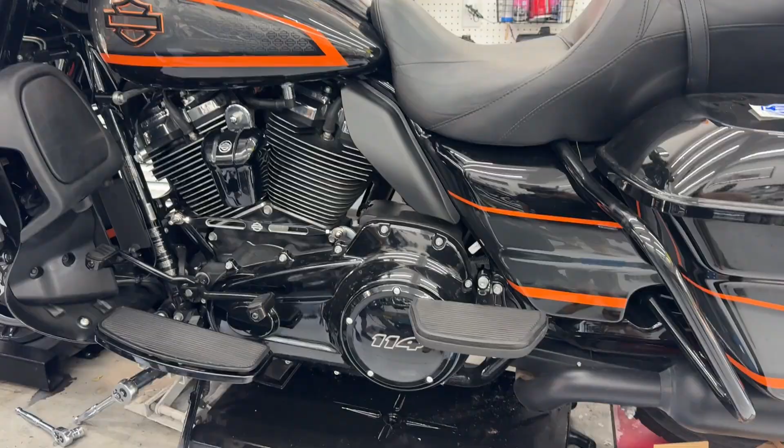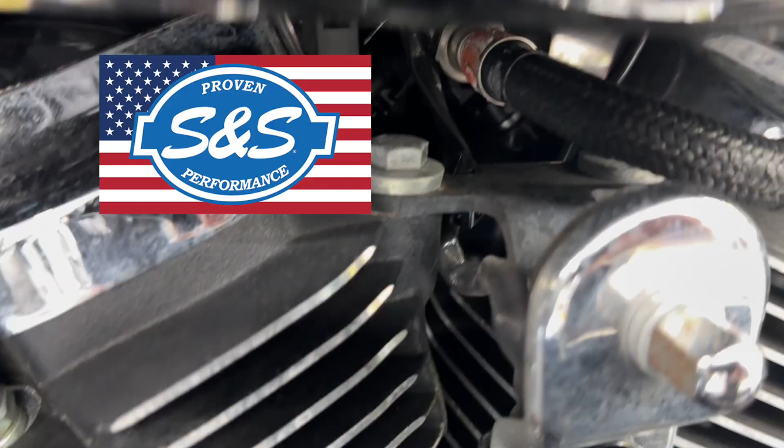What's up? We've got a really nice bike that we're going to work on today. This one's going to be getting the new S&S compensator to get rid of a potential problem. It's also going to be getting the new S&S intake manifold that's not plastic. We're going to get rid of the plastic one.

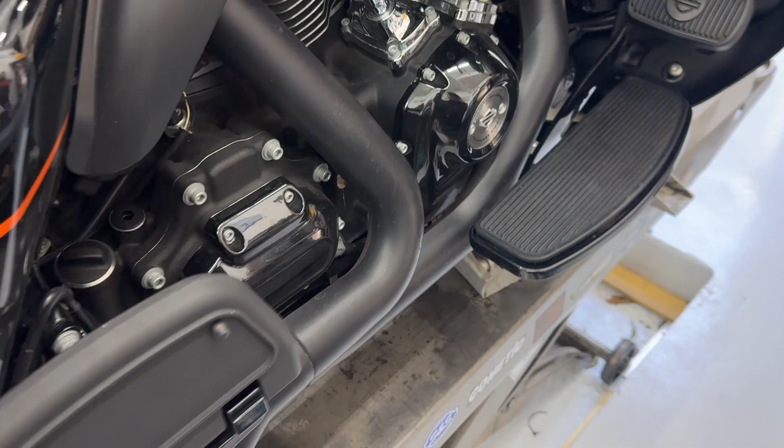It's also getting a good set of headers that's going to go behind the factory heat shields, and we're going to be installing a Thundermax to bring the engine operating temperatures down. We're going to leave the stock cam in it. So we'll show you where we're at here in just a couple of minutes.

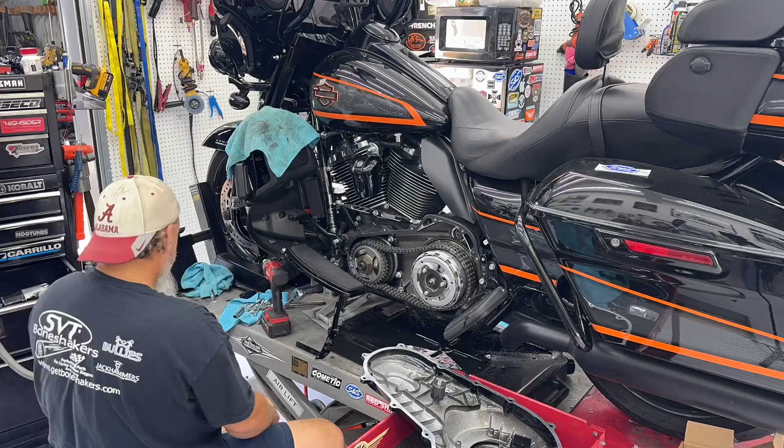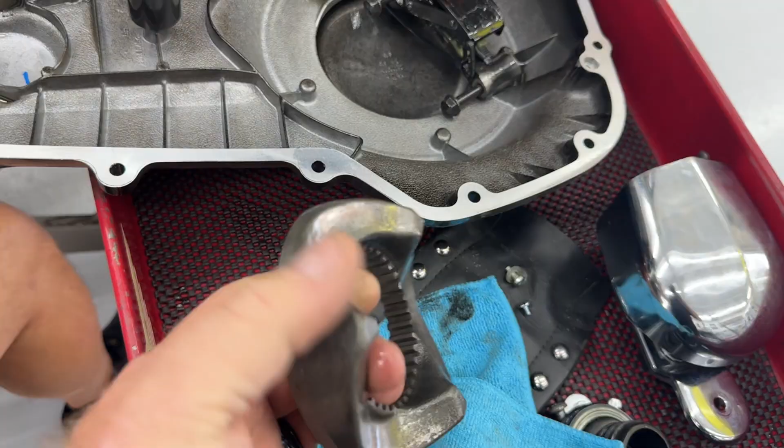All right, so the new compensator ramp is going in. Where's your old one at? Okay, so here's the old one. This is a cast steel. Cast steel is not nearly as strong as billet steel, or what's called extruded steel. And these things will split right here where this thin part is. They'll just split into three pieces without any warning.

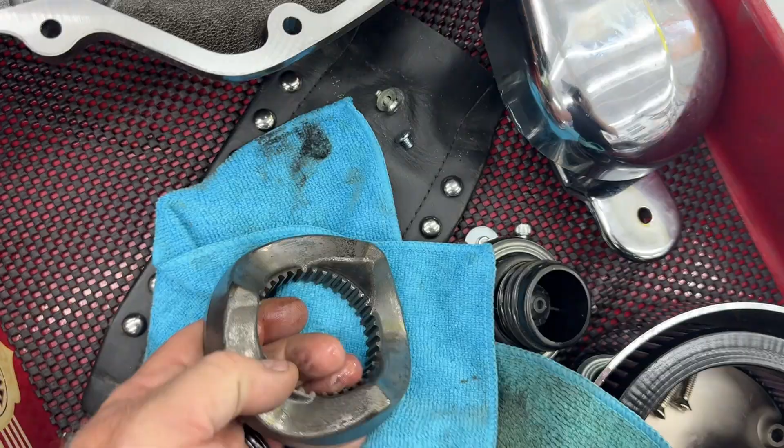You go to start your bike, crack. And that bike's not moving. You can't jump it. You can't push start it. You can't do anything. It's not moving. So any of you guys out there have a 17 or up bike, it's highly recommended that you replace the compensator ramp. Now, there's several different ones out there.

S&S has one. Cyclorama's got one. A couple other people have them. They're all of the same good quality. So we've used them all, and they've all worked well. Just out of convenience, we use the S&S because it's available from our source in one day. So that's why we choose to use it.

I did not know that.

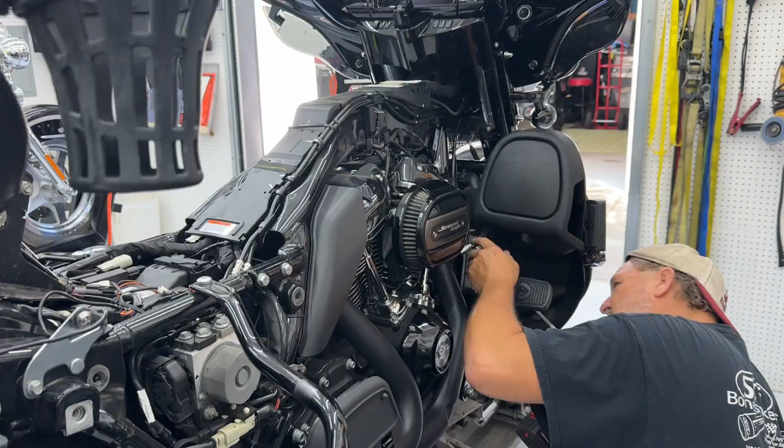And it's all back together. Now the next thing we'll do is pull the headers, and probably going to need to pull the gas tank and get the manifold installed and the Thundermax. All right, while Tony's removing the exhaust and intake manifold, I'm going to go ahead and prep the Thundermax. I thought I'd go over some habits that I've created over the years when I install these Thundermax units.

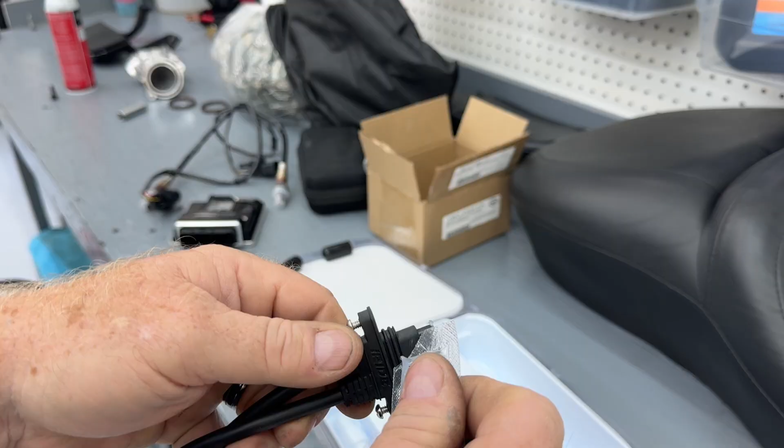So the first thing that's most important is they'll send you a little packet of dielectric grease. I always like to cut the corner off right here so I can get a precise little squeeze out of it. And then you want to put dielectric grease on every connection. Just simply squeeze a little bit, press a little bit, real easy. I always like to put just a little bit around the edges so it slides into the Thundermax easier. Anytime you can put a little lubrication on it, it makes it a little better.

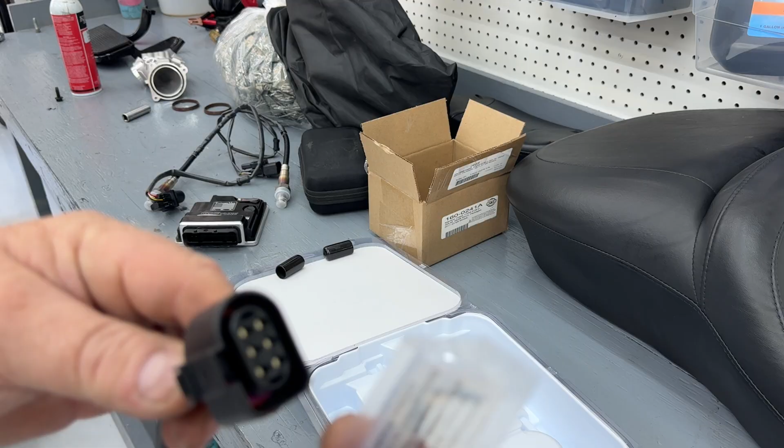That's what she said. Also, on these connection points here, you can just use the packet to smash it in. Right, same thing on this one. So you get a little bit of a precise squeeze out there for the Thundermax, and then we'll do the same thing on the other connectors.

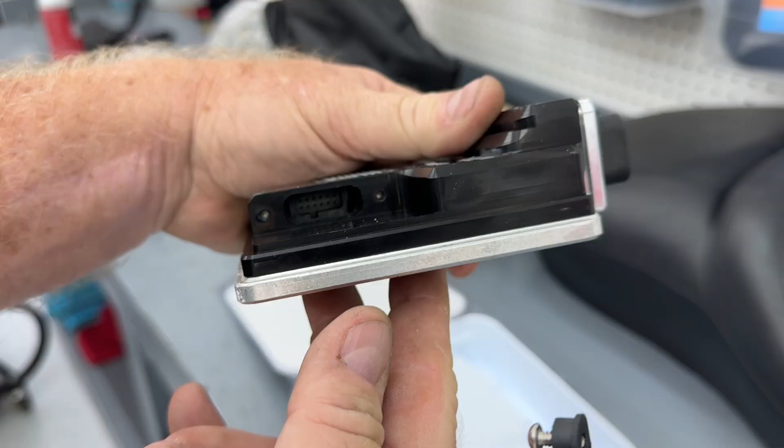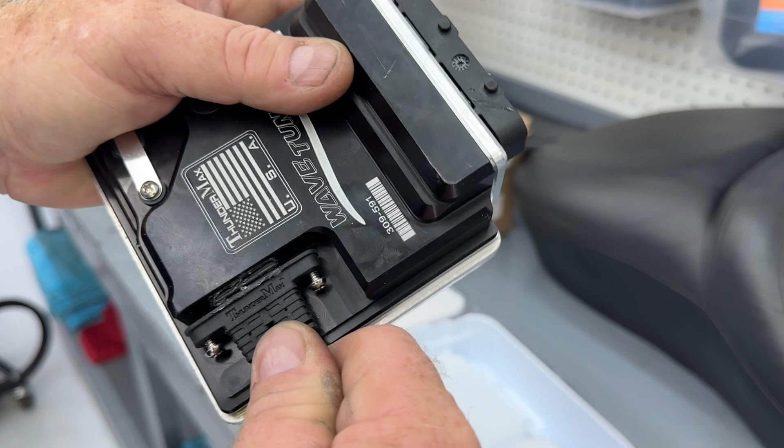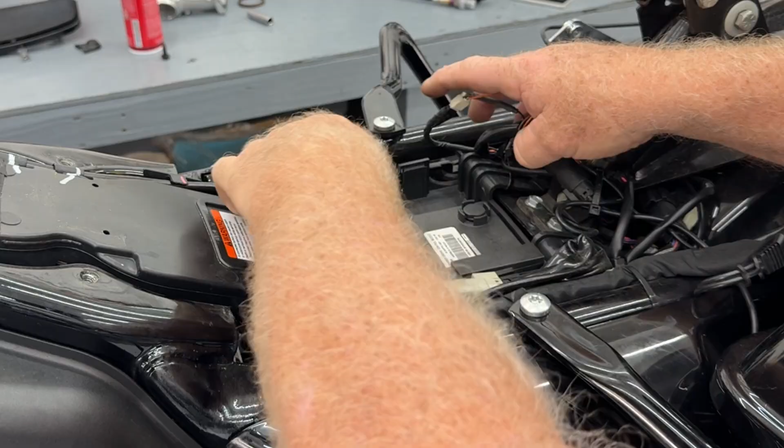Then, as you can tell, there's a tab down in there, and then there's a tab right here. So you'll simply push that in like that, and you're ready to go. And then screw the screws down, and that's pretty much the deal on that. All right, so the factory ECU is pretty easy to get out. And then this lever here, pop it loose like that.

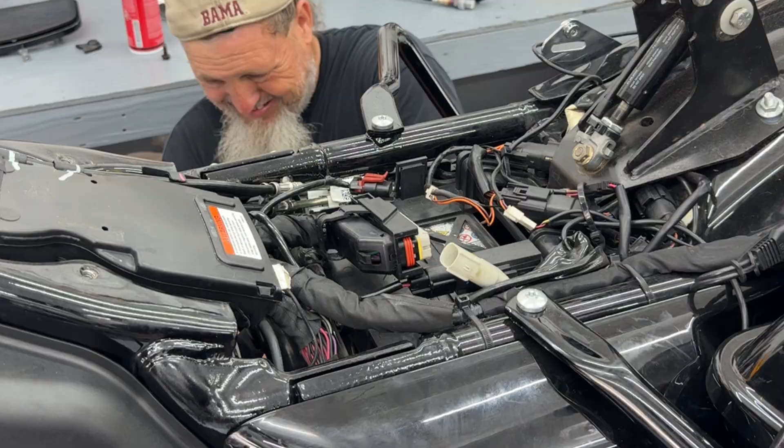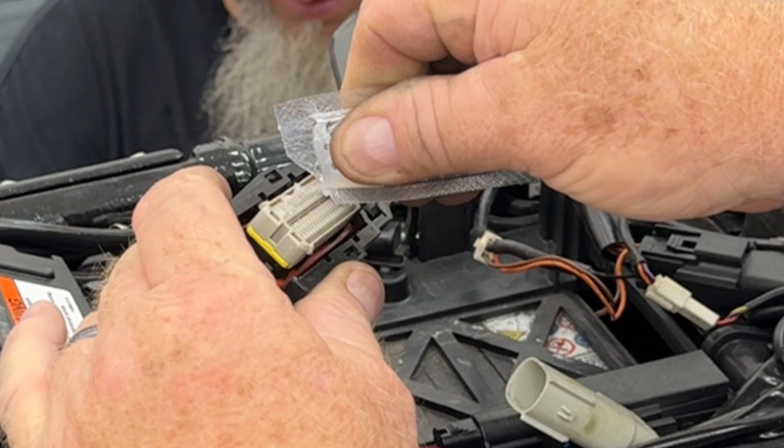All right, and then before we put the Thundermax in, we want to put dielectric grease on all the little female plugs here. Try to work it down in each one of the little ports best you can. Don't skip this step. It's very important. If you skip this step, you'll find out why it's very important. Eventually. May not happen tomorrow. May not happen next week. Might not happen for 6 months, but you'll eventually find out what will happen.

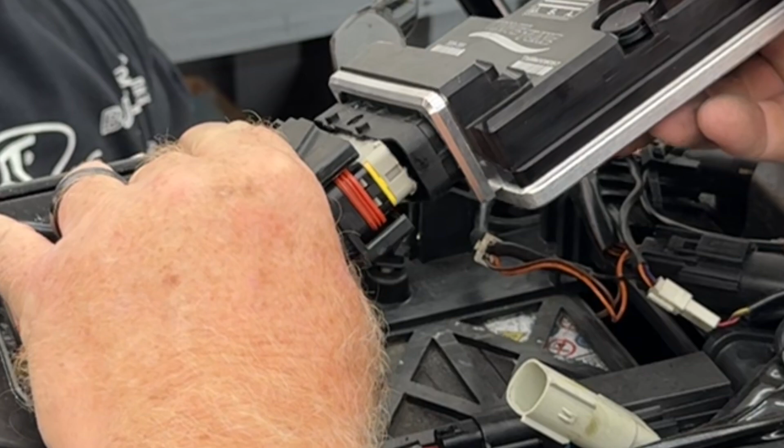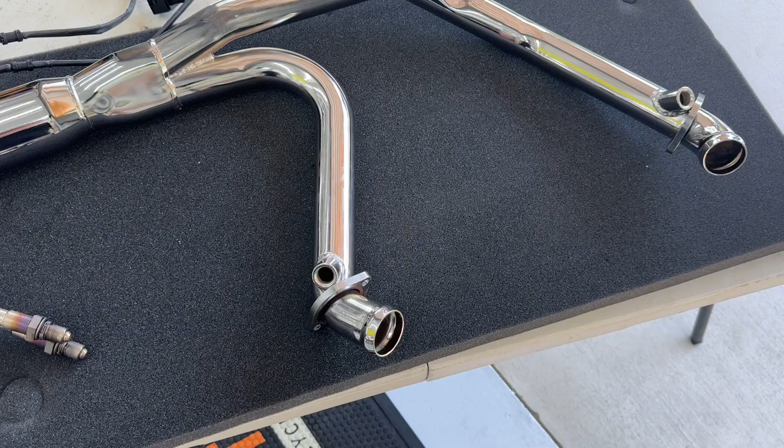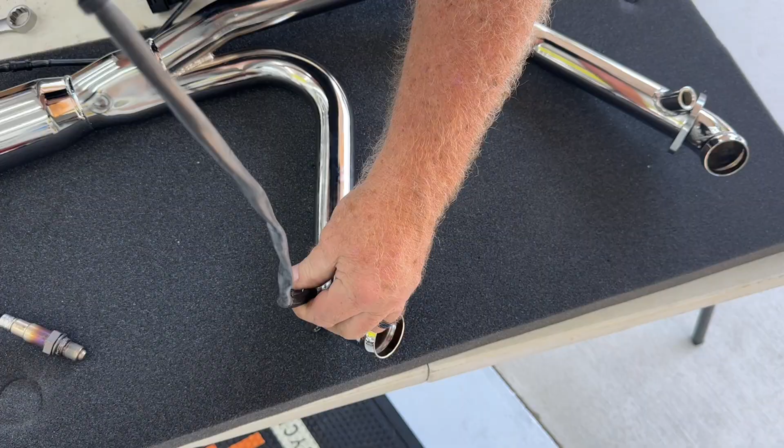All right, now we'll leave that there for the time being. A few moments later. Okay, the Thundermax comes with 18 millimeter O2 sensors that will fit into the Bassani header's 18 millimeter port. Now, that does have adapters. If you want to run your stock 12 millimeter O2 sensors, you can. It comes with adapters.

So if you wanted to run a 12 millimeter O2 sensor, simply screw the adapter in, and then you can run the 12 millimeter ports. But we don't need these today because we're going to run the 18s. But we'll hold on to these. We may need them in the future for another application.

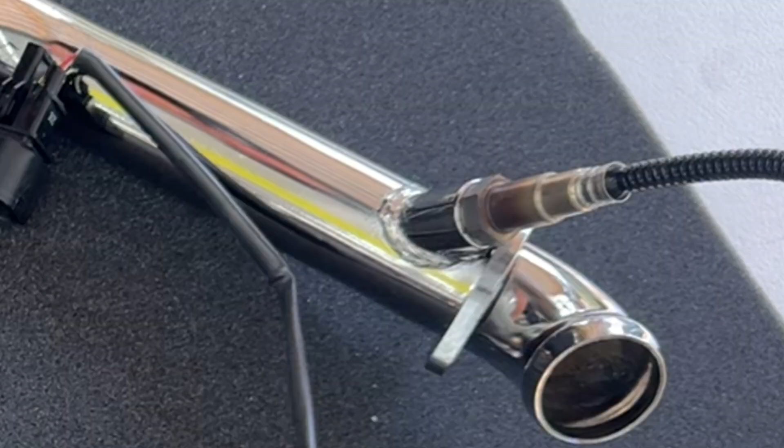Now, when you tighten these down, you don't have to suddenly turn green and turn into the Hulk. Bow to your sensei! Okay. You just simply snug them down like so, because they're not going to back out, because the wire tension itself is going to keep it from backing out. It's not going to twist upon itself, so you don't really have to tighten them that much. Just make sure they're sealed. All right, so there's that.

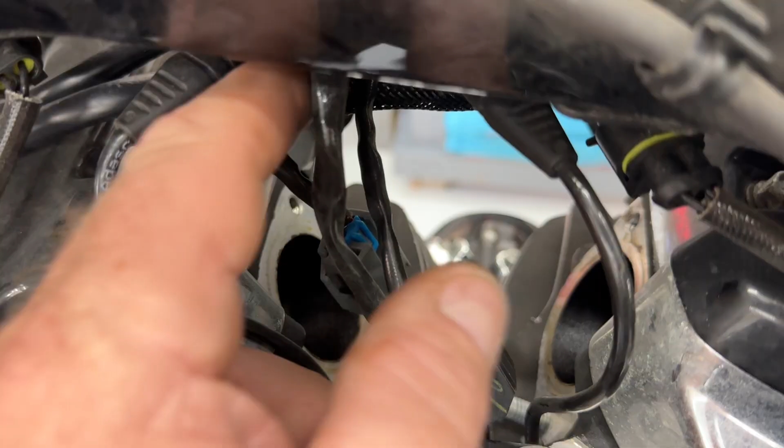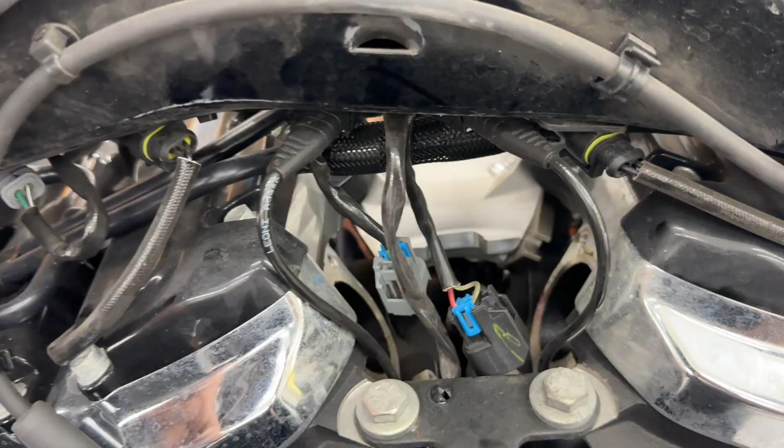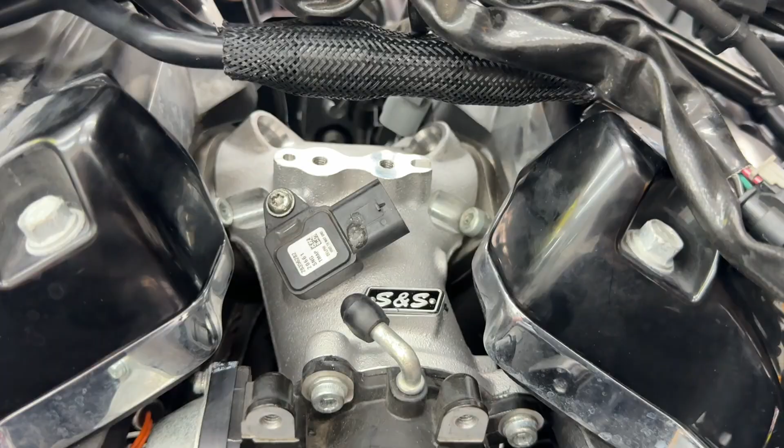Okay, so the plastic manifold has been removed, and we're going back in now with the S&S aluminum manifold. We're just getting rid of a problem. This is same factory specs, 55 millimeter, as the plastic one. It's just not plastic. Plastic melts when it gets hot. There's the S&S aluminum intake manifold. We're going to put the fuel rail on it here in just a second. Throttle body's still on it, and we'll go from there.

We gotta get it in the hole just right.

That's what she said.

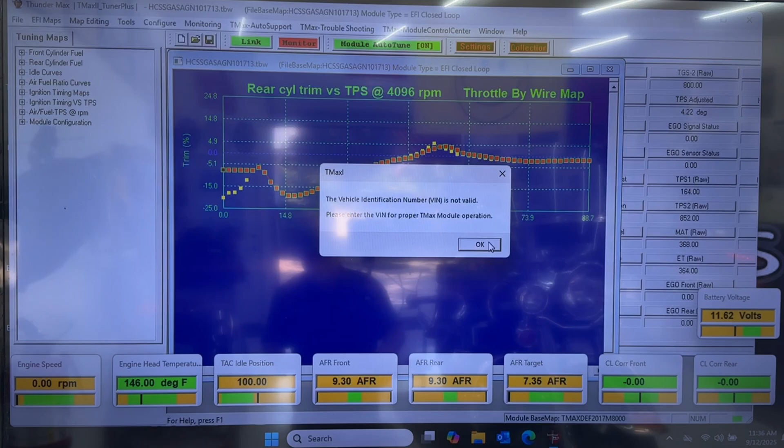And then that's the first thing it asks you for. So what we do is we go in here and we put in the VIN number. Okay. So the VIN number is, I'll tell it, okay. VIN number on a Harley always starts with 1HD. 351. And you can always use the test VIN code tab here. It tells us what we got. A 22 M8 114 FLHTK. All right, that's good.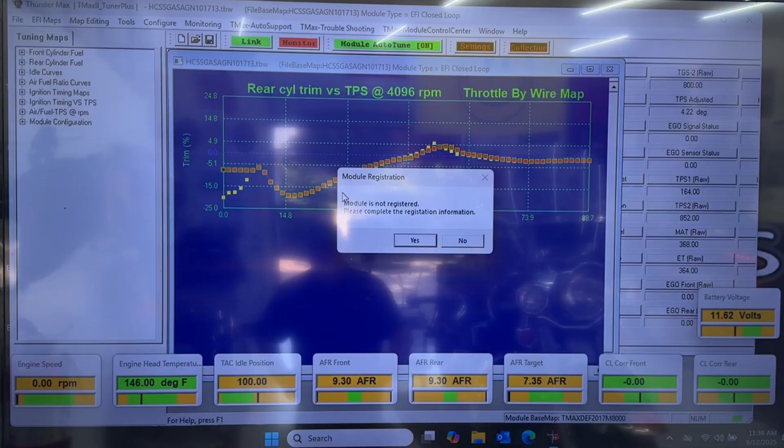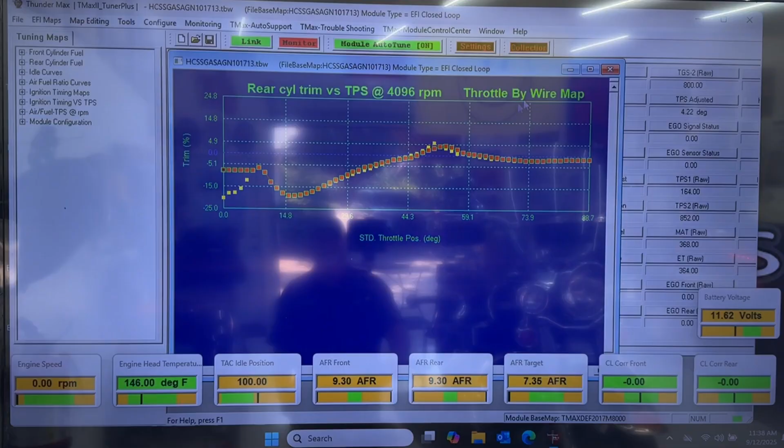Okay, now it's going to ask us to register it. Say yes. All right. So that registers the warranty. Okay, good deal. All right. So now it's time to put a map in here. So if you have any of these open screens on here, just shut them down. You don't want to mix up anything.

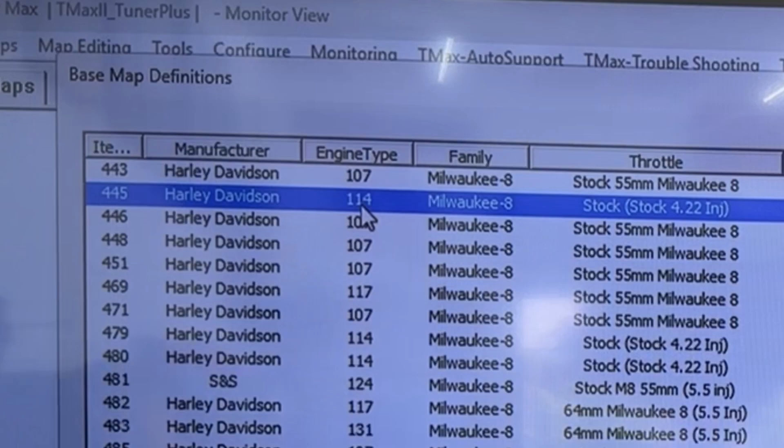So we're going to go up here to map editing, or excuse me, EFI maps, and it's Big Twin M8 maps. So to isolate the 114s, highlight it in blue, move your cursor to the 114 and right click on 114. It brings up only 114 maps. We're going to be going with a stock cam. So we will hit the stock cam tab right there. That leaves 2. It's got a high flow breather. We're going to use map number 479. That's a 2-1 D&D. We're using a 212 header, so that's okay. So we're going to go ahead and load that base map just like that.

And we're going to hit map editing and write the map into the bike. Just like that. All right, so the next thing we do is we just go over here and turn the power on the bike off, which is the same thing as restarting a computer on your desk. We're going to wait for the green light to go out. That acknowledges that the bike has actually turned the power off. There we go. So now we're going to turn it back on. We're going to wait for the green light to come back on. We're going to do this 3 times. This is what's recommended by Thundermax on the initial install.

Wait for the green light to come on. And the green light's on. So now we're going to shut it off. That's number 2. Wait for the red light to go out. Okay, turn it back on. This is the 3rd time. Wait for the green light. All right, let's shut it off. Wait for the red. Now this time, when it comes back on, we're going to go over here and verify some settings in the module configuration, some basic settings. As soon as it turns red, we'll turn it back on. All right, let's turn it back on. That's your 3 cycles. All right.

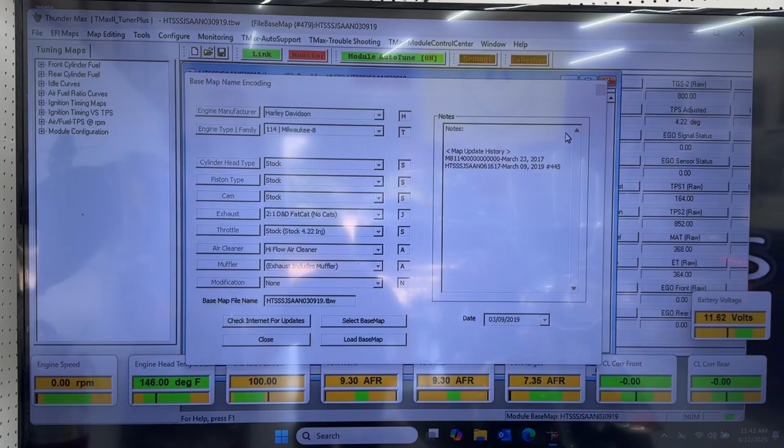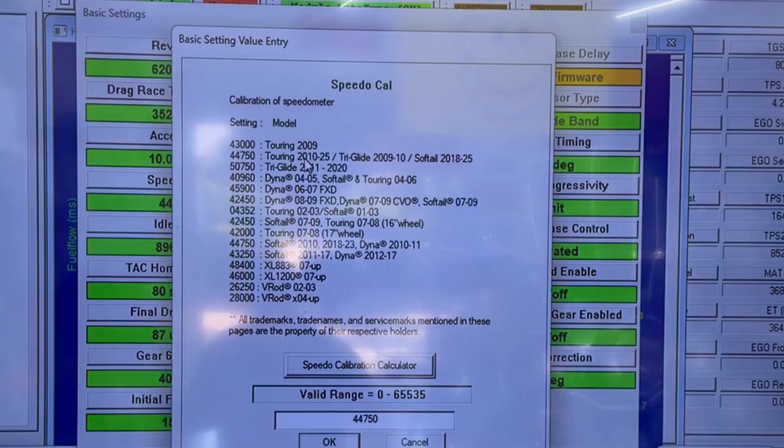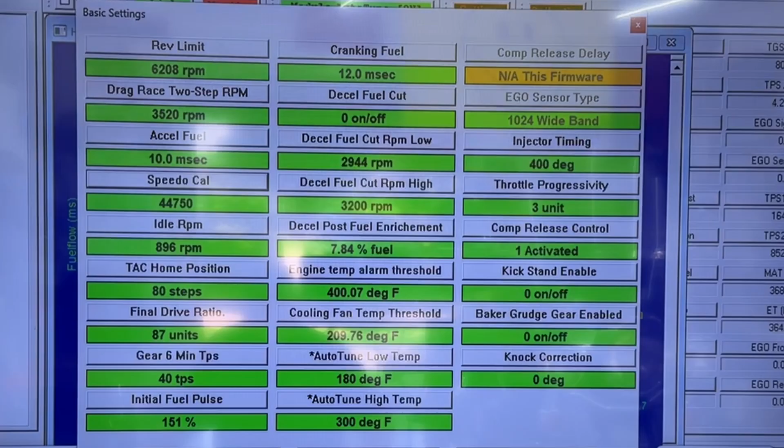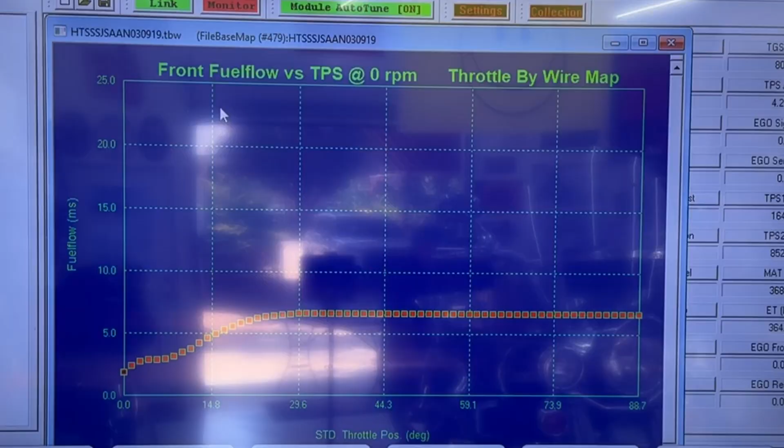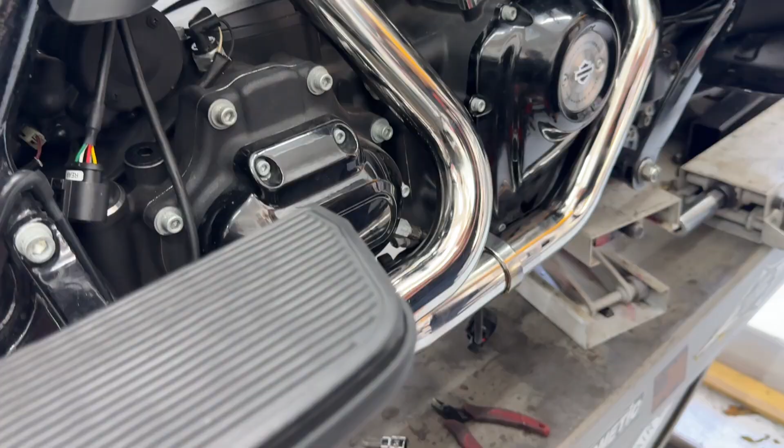Okay, Tony's got the breather back on. We've got the Bassani headers installed, and we're going to be doing the rest of the system here shortly. It won't be long before we fire this one up. All right, mufflers are on. Heat shields are going on. This little project's rolling right along real good.

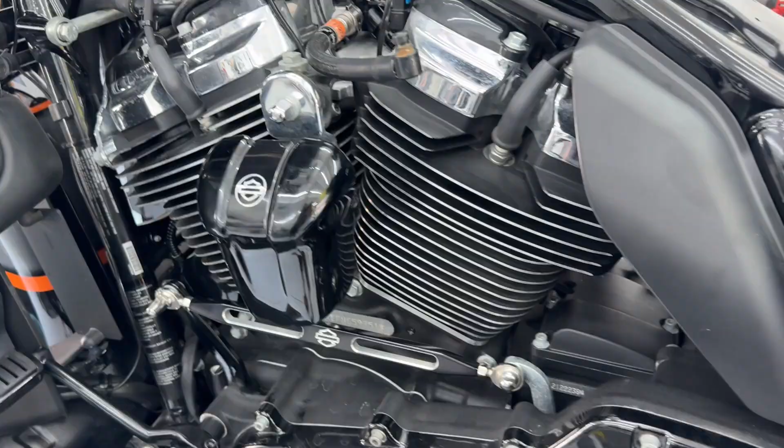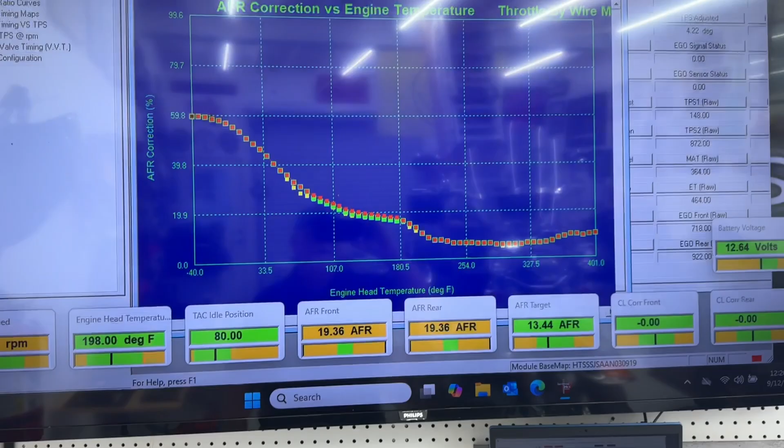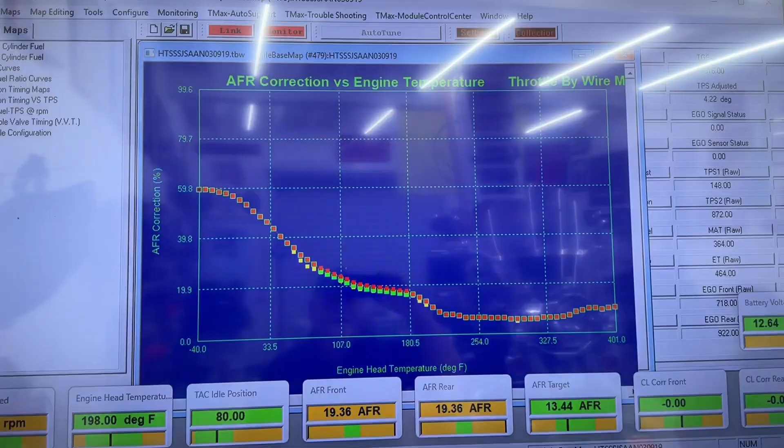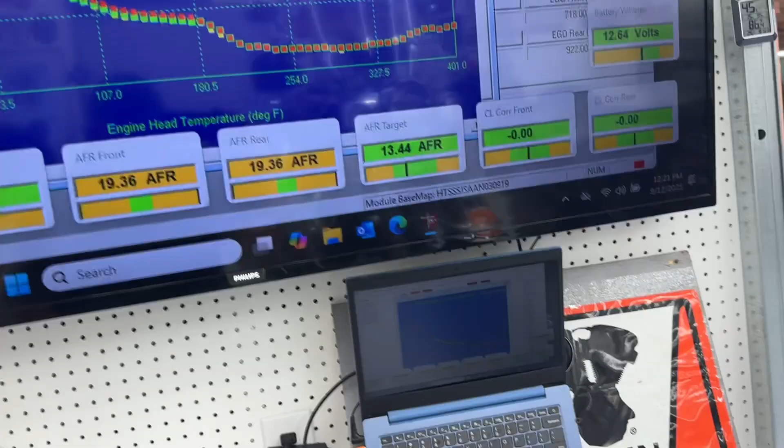All right, so the initial run up, what we call the idle tune, this is really all it changed. We didn't put a cam in the bike. We did nothing with the injectors. Basically, this is a stage 1 set of headers. It already has a high flow breather and an aluminum intake manifold. So it's not going to learn a whole lot because this is a stock map, 479, stage 1, 114 map. So with that said, it's doing what it's supposed to do.

Well, you sound like a pretty handy guy. Yeah, well. We're real happy with the outcome.

So this one will be buttoned up and sent home.